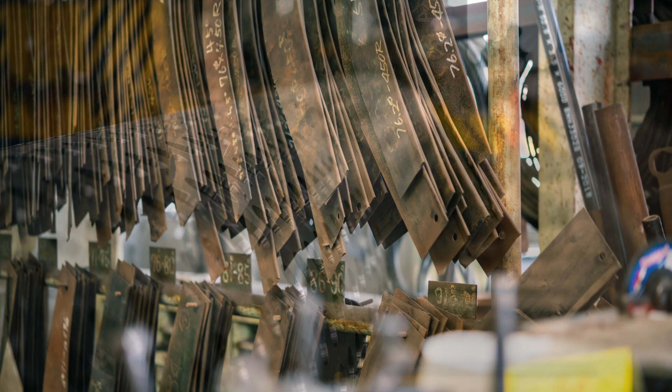Founder Tsunekichi Takuma, who had previously invented the first water tube type boiler to be entirely produced in Japan, established our company in 1938. Ever since then, Takuma has created boilers for various applications as an industry pioneer, carrying on its philosophy of serving society and protecting the environment through boiler manufacturing.

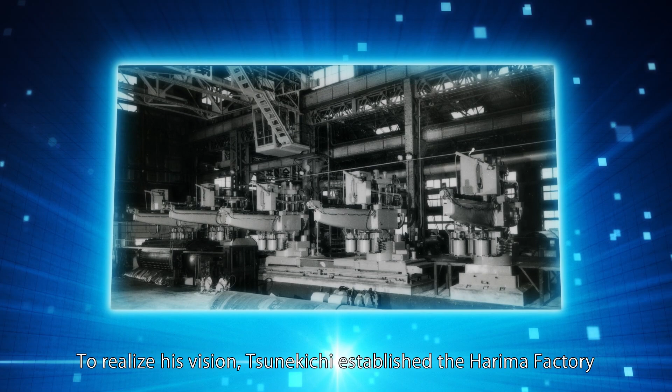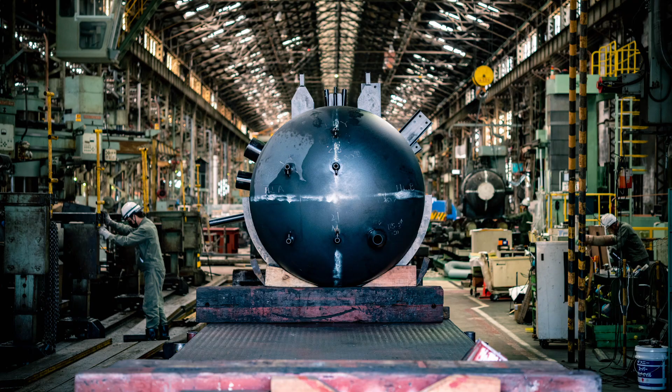To realize his vision, Tsunekichi established the Harima Factory as a manufacturing center for Takuma products in 1942. For about a century, we have manufactured high-quality, reliable products and earned the trust of customers, as well as meeting the needs of society.

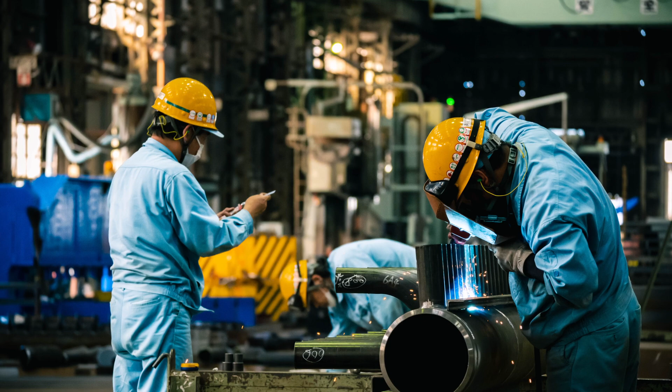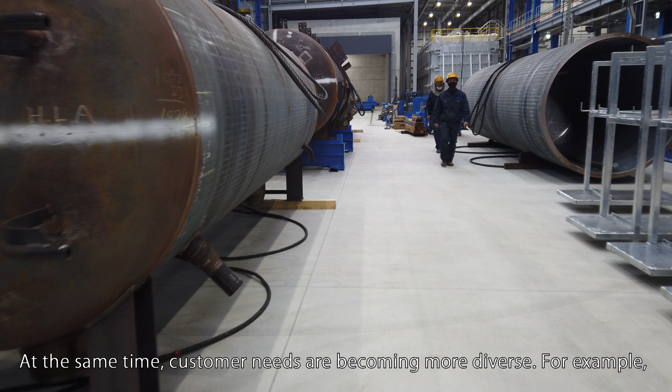We are now being called on to help create a more sustainable society by addressing climate change and promoting circular economies. At the same time, customer needs are becoming more diverse. For example, there is an increasing demand for larger capacity boilers, as well as ones that operate at higher temperatures and pressures.

To help meet these needs and provide even greater contributions to society and the environment, the new, improved production center, the Takuma Harima Factory, was opened in January 2023.

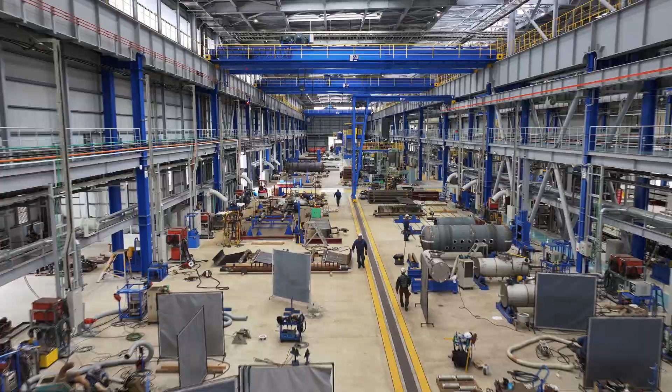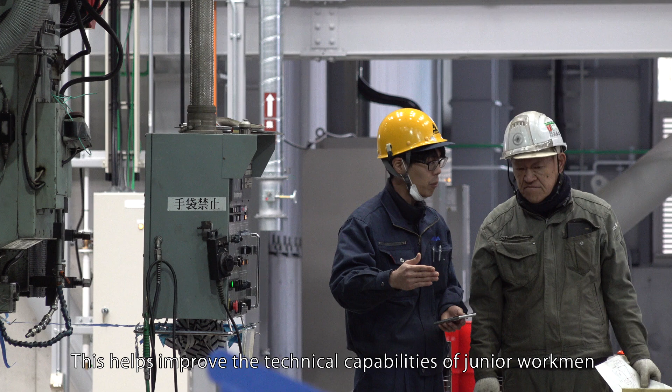Productivity has been improved by rearranging equipment layout for optimal production efficiency, automating operations, and introducing digital technologies. Digital tools have been used to analyze the masterly skills of technical experts. This helps improve the technical capabilities of junior workmen and ensures that skills are passed on to later generations.

As part of the factory's eco-friendly, person-friendly design, a courtyard has been created for employees to relax and unwind. The emergency power equipment and supply stockpiles, flooding countermeasures, and improved seismic resistance enable it to be used as an evacuation site in times of disaster.

It is also environmentally friendly thanks to its improved lighting, superior insulation performance, and use of rainwater. Furthermore, the facility is powered completely by renewable energy, so it helps reduce greenhouse gas emissions.

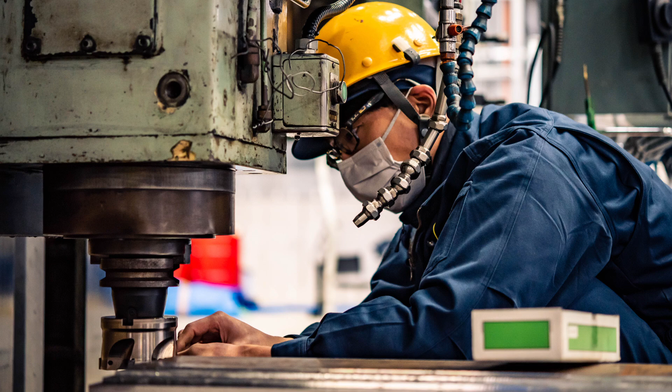The Takuma Harima Factory is a human-friendly, eco-friendly, sustainable production center that will continue to meet the needs of customers and society.

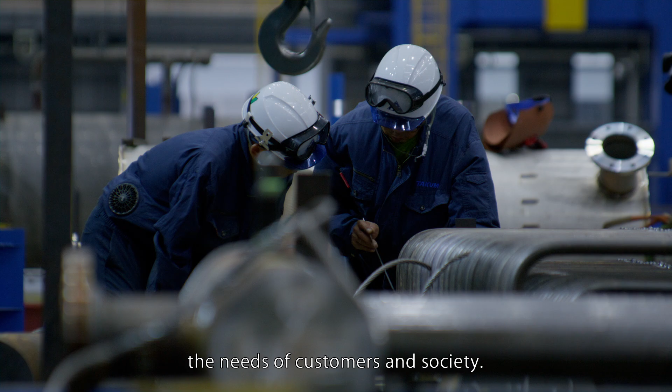Creating the future, the Takuma Harima Factory.

The Takuma Harima Factory is now even more eco-friendly and has an even higher level of productivity. Let's have a look at its production equipment through the processes used in boiler manufacturing.

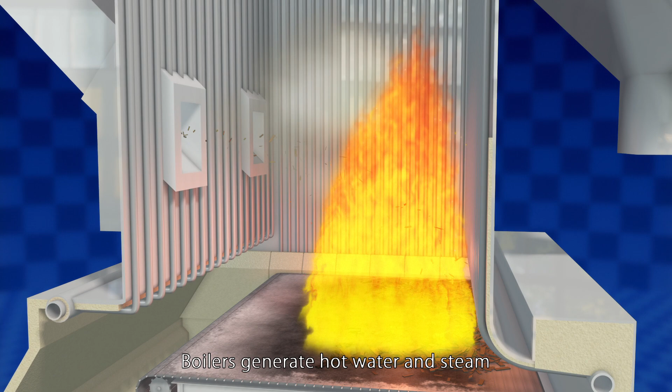Boilers generate hot water and steam using heat reclaimed from combustion. The boiler manufacturing process involves forming, welding, assembly, and inspection.

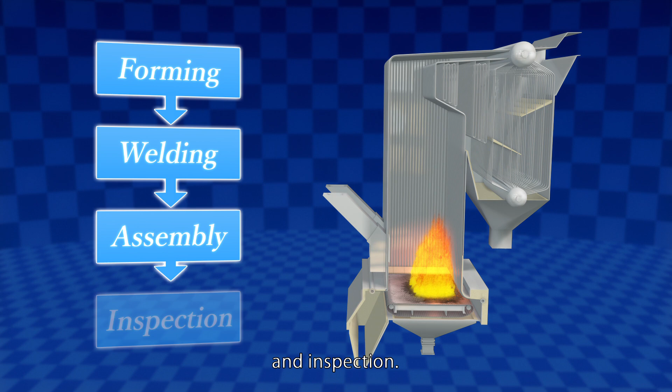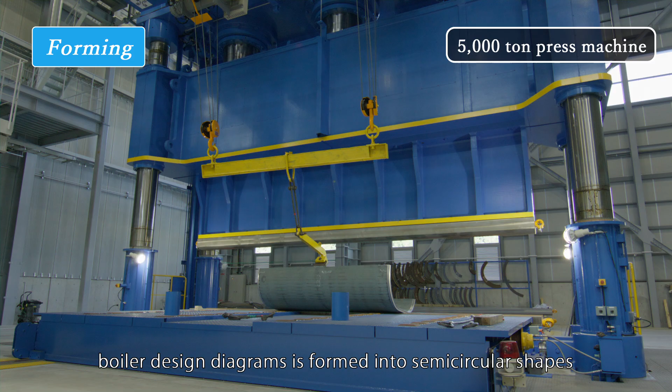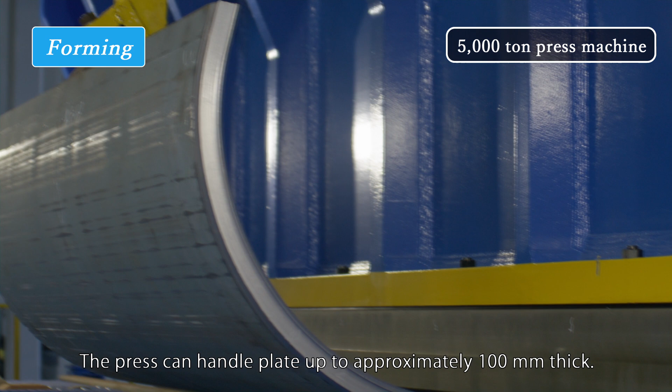First, thick sheets of shell plate that have been cut according to boiler design diagrams are formed into semicircular shapes using a 5,000-ton press machine. The press can handle plate up to approximately 100 millimeters thick.

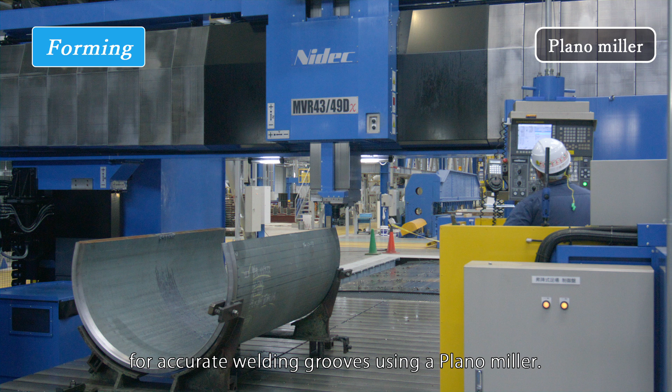Next, both ends of the semicircular plates are machined for accurate welding grooves using a plano miller. These will later be assembled into a cylinder and welded together. This equipment uses machining programs which enable automatic operation.

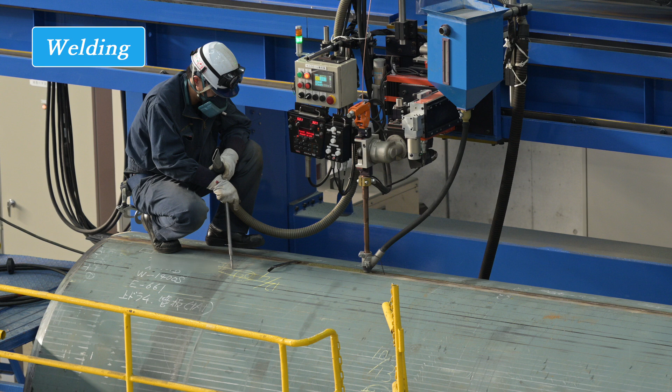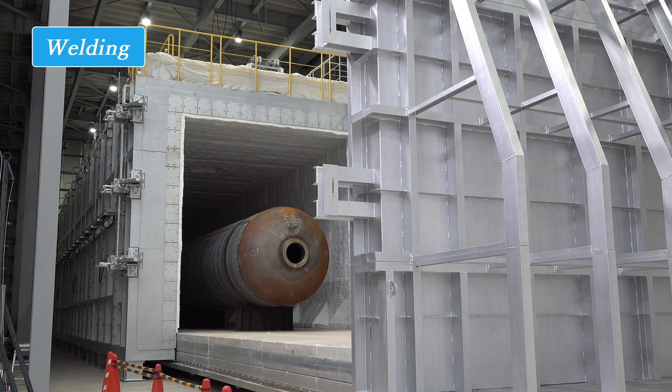Digitally controlled welding is then performed on the cylindrical shell plates. To relieve any stress that welding may have caused, the boiler drum undergoes heat treatment called annealing. The gas annealing furnace normally reaches temperatures of approximately 600 degrees Celsius.

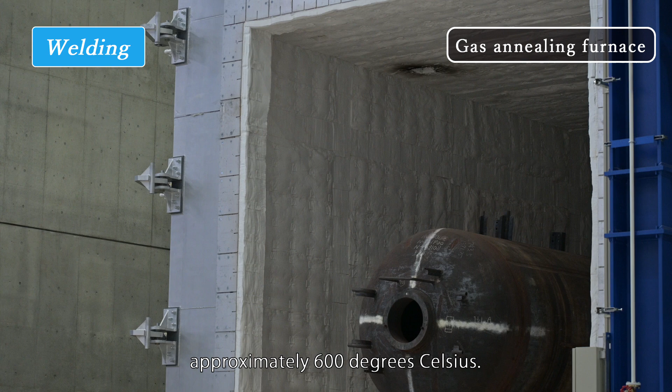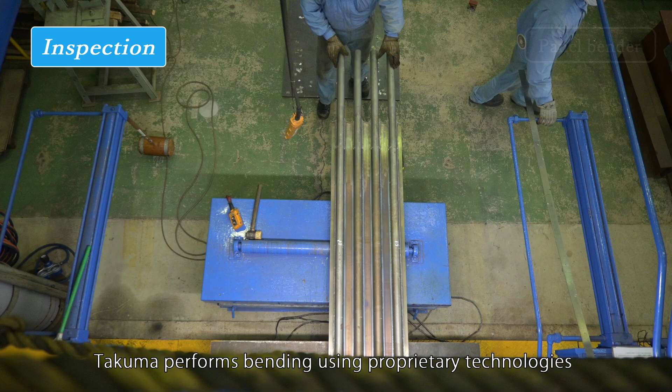Water tubes are also critical boiler components. Takuma performs bending using proprietary technologies and its long years of experience.

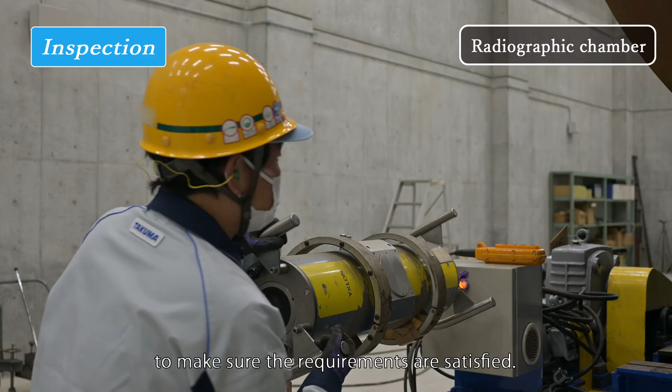Radiographic testing is then performed to check the welding condition to make sure the requirements are satisfied. The radiographic chamber is large enough to accommodate drums of up to 20 meters in length.

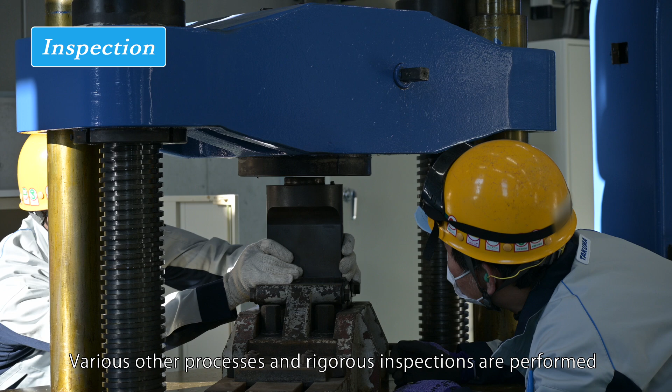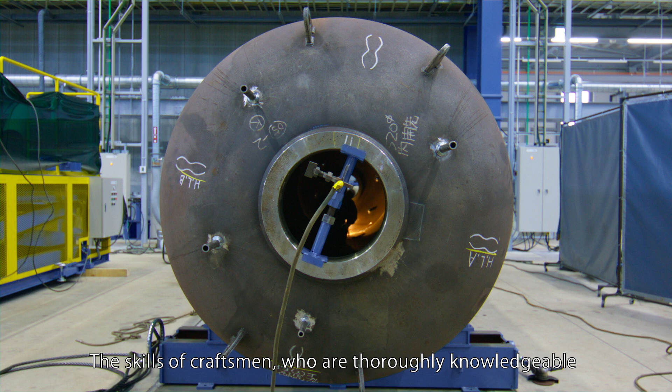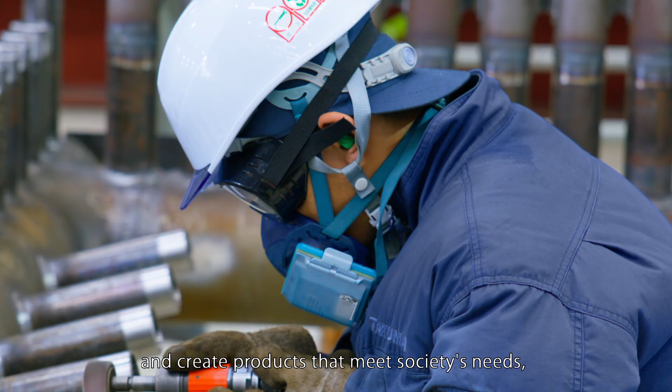Various other processes and rigorous inspections are performed before the boiler products are shipped. The skills of craftsmen, who are thoroughly knowledgeable about welding and the properties of iron, are vital to boiler manufacturing. We combine the latest equipment with the skills of craftsmen to satisfy the requests of our customers and create products that meet society's needs, constantly pursuing the ultimate in quality.

Boilers are partially assembled at the factory to a size that does not interfere with transportation. Then final assembly is performed on site.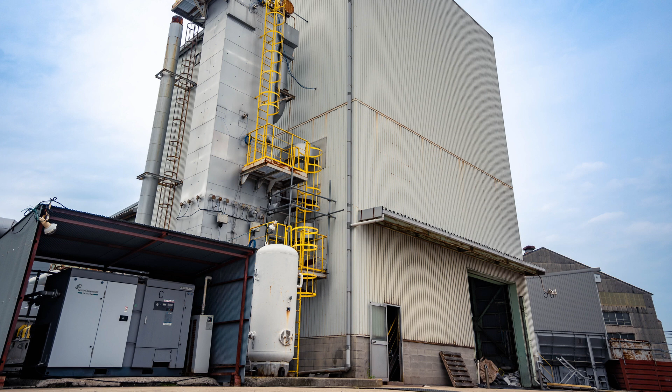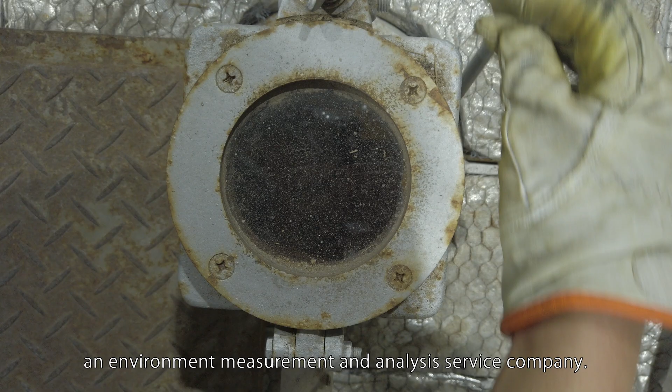The factory also has an R&D center where we coordinate with Kankyo Sol-Tech, an environment measurement and analysis service company. Together, we develop various types of combustion experiments, boiler technologies, waste treatment technologies, and water treatment technologies for achieving high levels of efficiency and performance while protecting the environment.

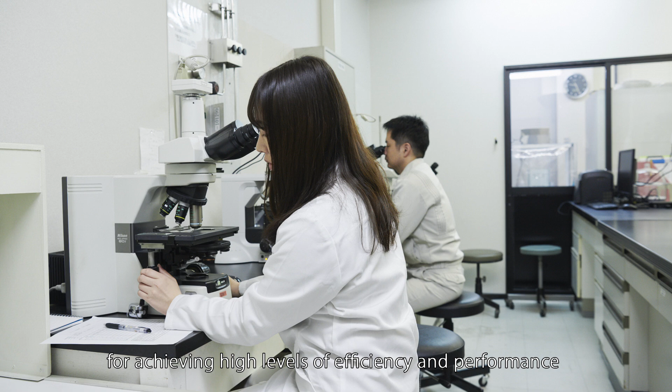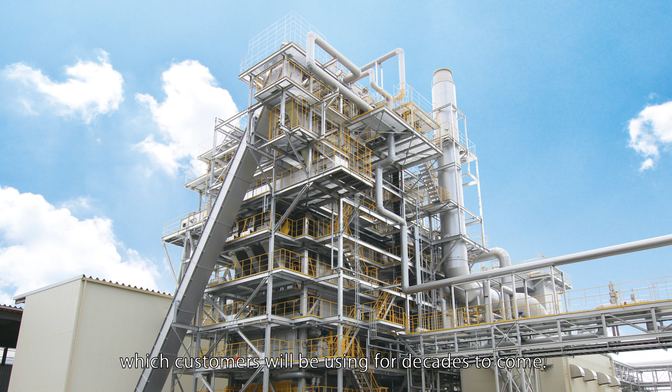The new factory is also home to a new and innovative section, the Supply Lab. The plants supplied by Takuma are infrastructure facilities which customers will be using for decades to come. Ensuring stable operation is the highest priority. It is important to manage spare parts and keep them on hand so that if a plant's operations are shut down due to aging or malfunctioning equipment, operations can be restored quickly.

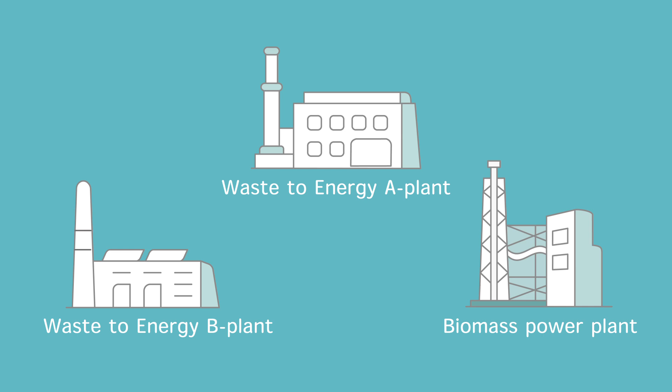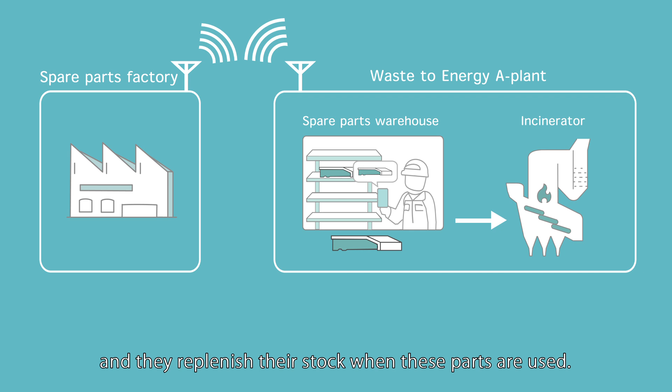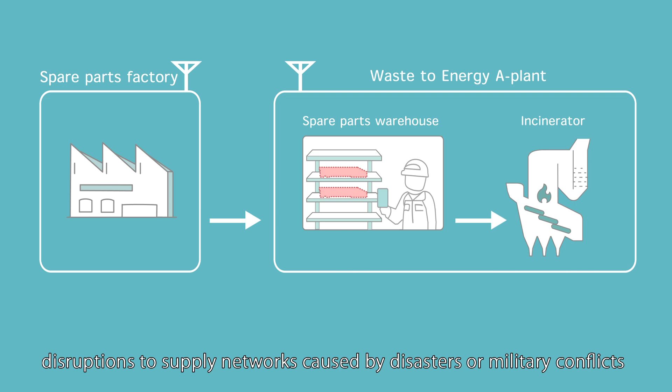Typically, spare parts are managed separately for each facility. Many facilities only have limited quantities of specific parts on hand, and they replenish their stock when these parts are used. However, they sometimes suffer spare parts shortages due to unexpected wear or disruptions to supply networks caused by disasters or military conflicts, which hinder the stable operation of plants.

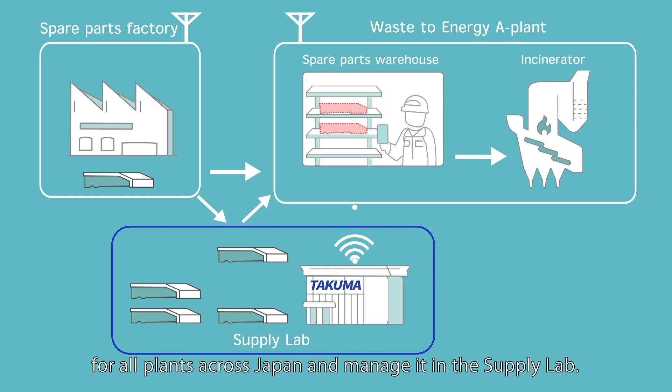Takuma uses ICT to collect spare parts inventory information for all plants across Japan and manage it in the Supply Lab. It also coordinates with Solution Lab, the remote monitoring and operation support center located in the Takuma head office, to provide extensive after-sales operation and maintenance services.

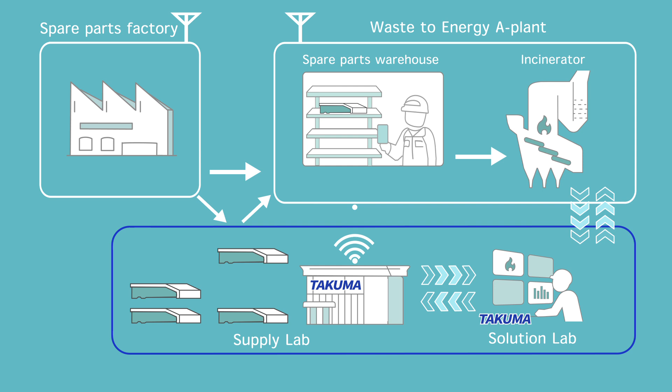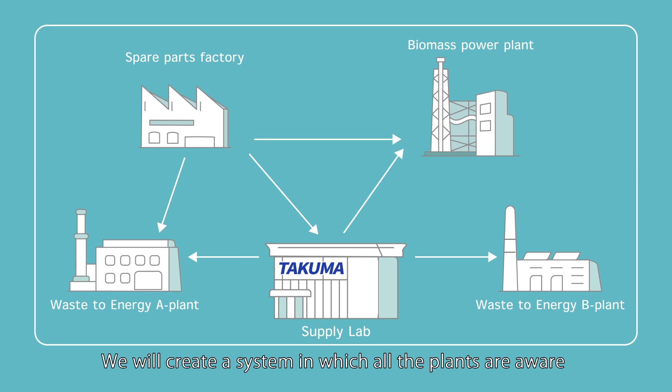We are planning to treat each plant that stocks spare parts and each parts manufacturer's factory across the country as a warehouse in the future. We will create a system in which all the plants are aware of inventory levels in neighboring warehouses so that spare parts can be rapidly supplied to them on demand.

Takuma's business is primarily focused on the renewable energy utilization and environmental conservation fields, where we supply waste treatment facilities with boilers, biomass power plants, and water treatment plants, along with operation management and after-sales services.

The Takuma Harima Factory has been reborn to better respond to environmental problems and meet the needs of society. Takuma will continue to strive to contribute to society by providing goods and services that are needed and recognized as valuable in society.